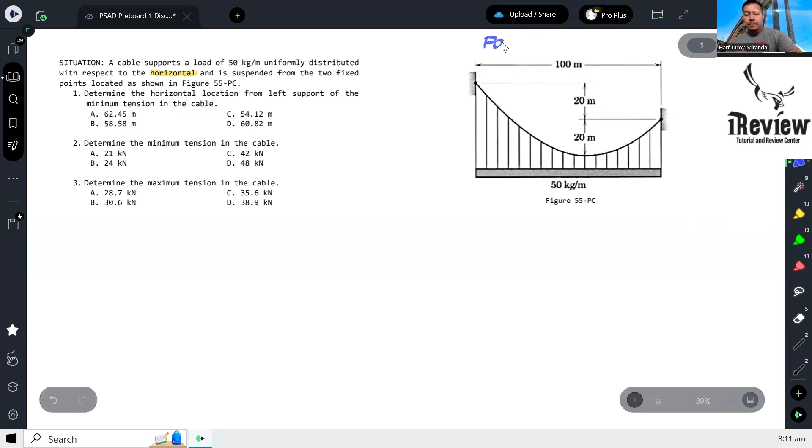All right. So, ang tanong, what is the horizontal location from the left support of the minimum tension in the cable? Determine the minimum tension and the maximum tension.

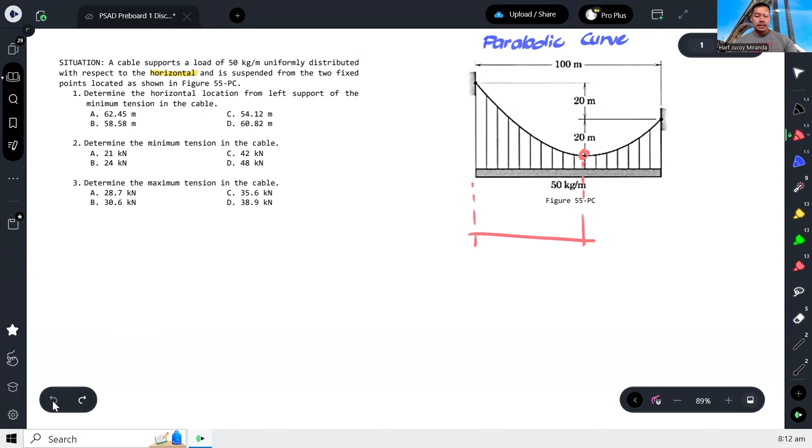Alright? So, para makuha yun, dito ima-maximize natin yung square property of parabola na kung saan, di ba, yung square property of parabola is just parang ratio and proportion yan. Yun nga lang, naka-square yung isa, in this case, yung x.

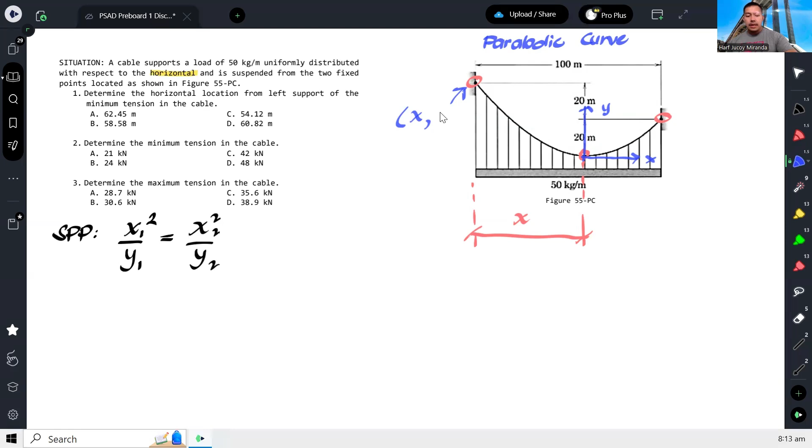So, lumalabas, ang coordinates niyan would be sa kaliwa, x. Tapos, yung height niya from the bottom is 20 plus 20, 40. Tapos ito naman, itong kabila, so tinawag natin na x, itong kabila ay magiging 100 minus x. So this will be 100 minus x and 20.

Okay, so applying those 2 points dito sa square property of parabola, we will have yung sa kaliwa muna, x squared over 40 is equal to, yung sa kanan naman na point, 100 minus x squared over 20. And from here, we should be able to calculate yung location. So shift solve na lang natin.

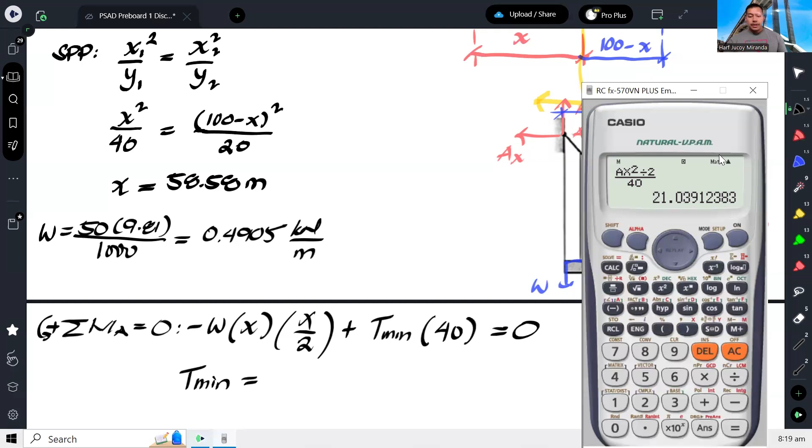And then yung minimum tension, ang moment arm naman nun ay 40. Ito yun. Okay? At ang rotation nito would be counterclockwise, so positive. And that's it. All equal to 0, so we can calculate for the minimum tension. So that gives us 21.04 kilonewtons.

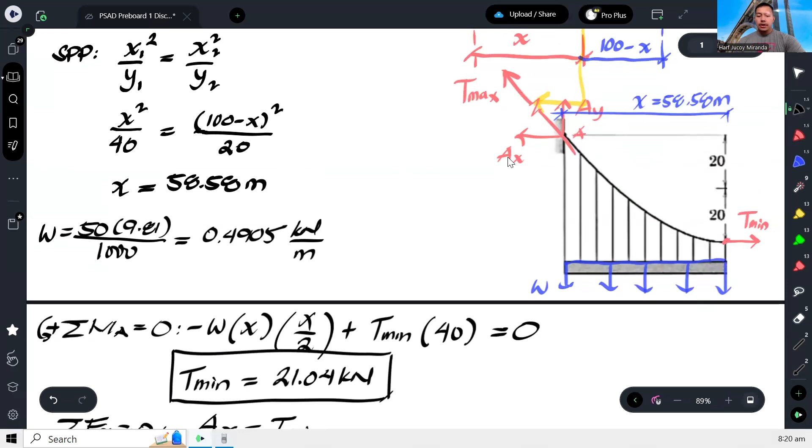So ang AX natin, if you take summation of forces X is equal to 0, AX will be equal to T minimum. Kasi sila lang naman yung horizontal components, di ba? Or horizontal forces. So therefore, ito ay 21.04 kilonewton. And then lastly, if you take summation of forces Y equal to 0, yung AY natin ay magiging equal dun sa resultant ng uniform load, which is W times X. That's 28.73.

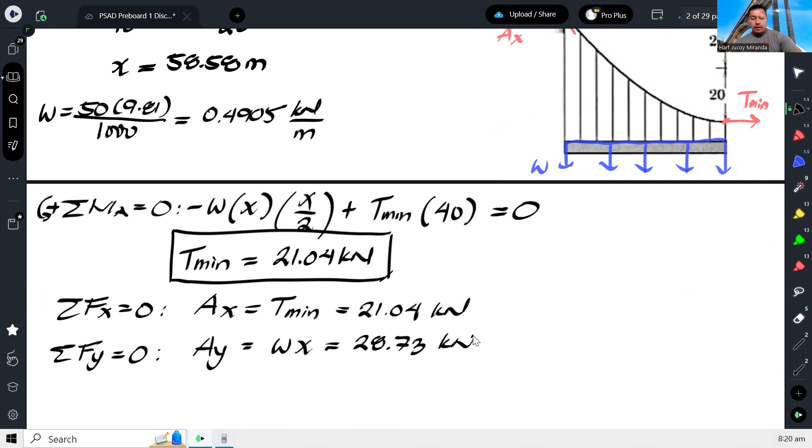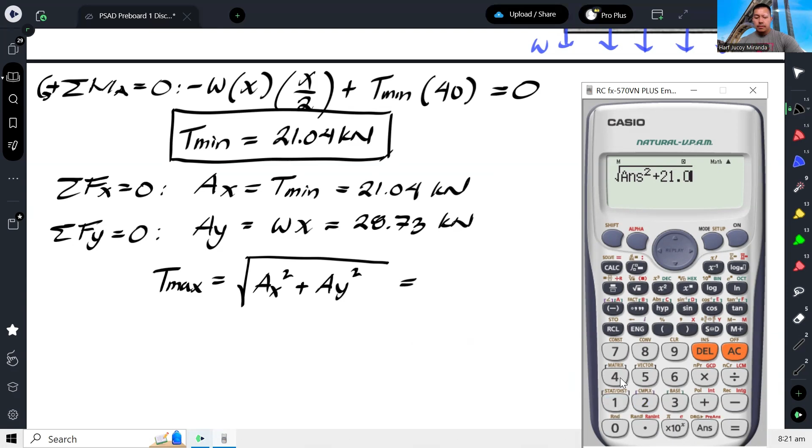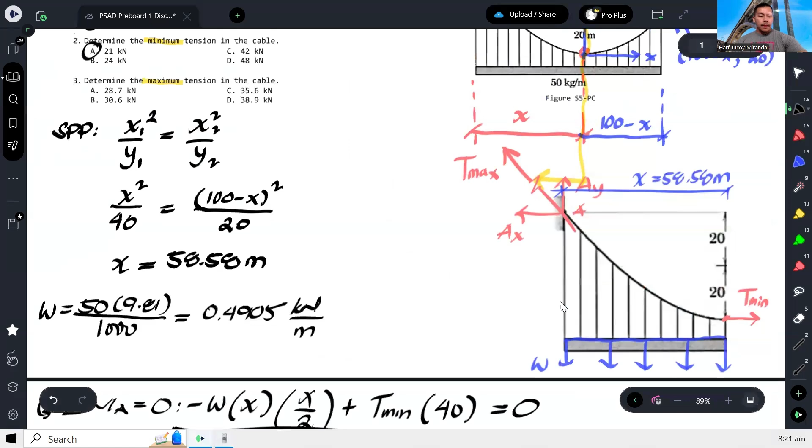Okay, and therefore, our maximum tension can now be calculated as the resultant of AX and AY. So that's 35.61. So for number 3, our answer would be letter C. And that's how we solve this problem.